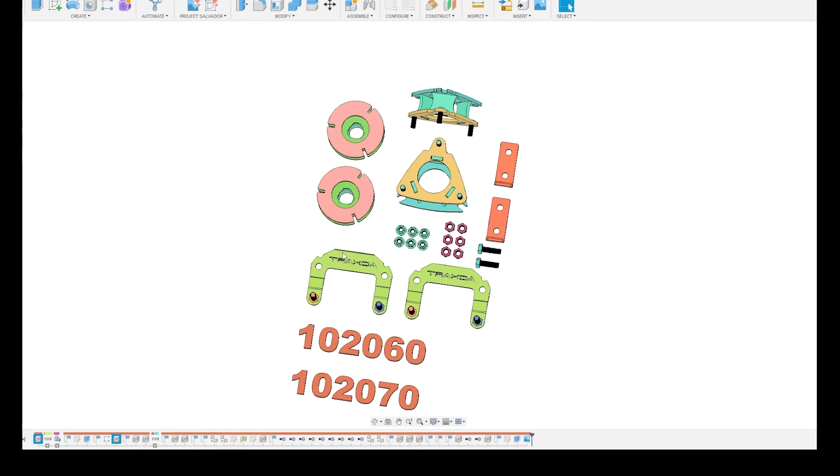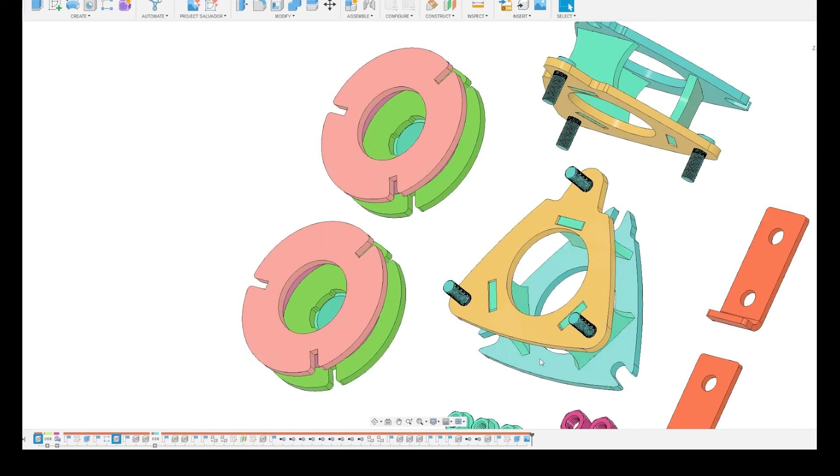So in the 10-20-60, 10-20-70 kits, the front strut part here has got a bit of an offset to that. And the reason we put that in is the MacPherson strut front ends, they tend to go a little positive camber as you lift them. And so what we're doing with this offset is we're changing some of that positive camber back to where it needs to be. The other parts for the front end that we use are these sway bar link extenders, which effectively make the sway bar link shorter.

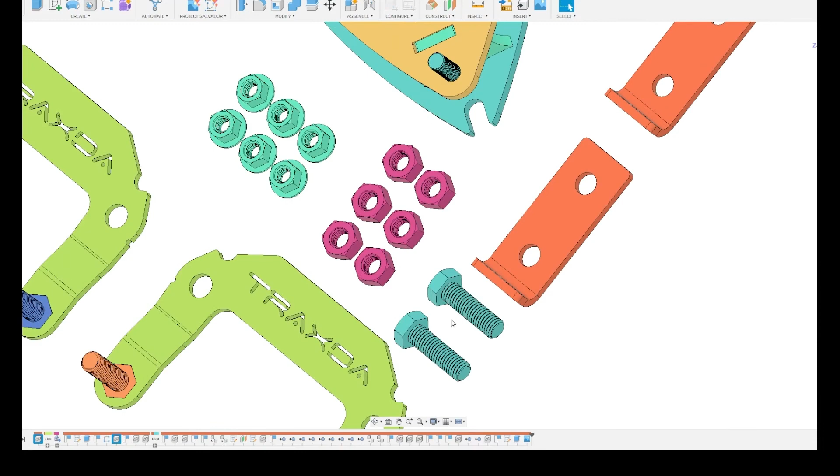The sway bar links go up to the strut instead of down to the control arm. So when we lift the truck, we have to make them shorter. The hardware with it is right there. Going to the rear of the vehicle, we have these rear spacers. The rear spacers have got some little notches in them for our ease of manufacturing. And then we have the rear shock extension.

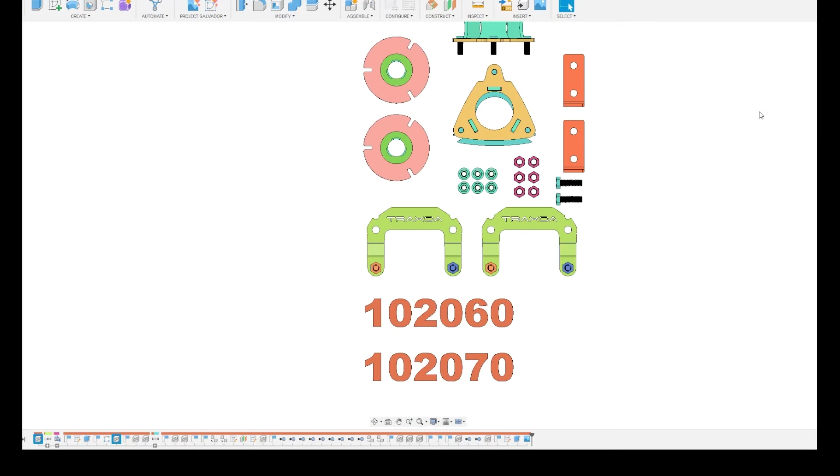So if you have this Ford Explorer, you can run a 265/65/18 tire on it, which is like a 31.5. I think that you're going to find that the front spring basket is the limit for how much tire you can put on your vehicle. Some people can probably get more crazy with some wheel spacers and stuff, but we have not tried that ourselves.

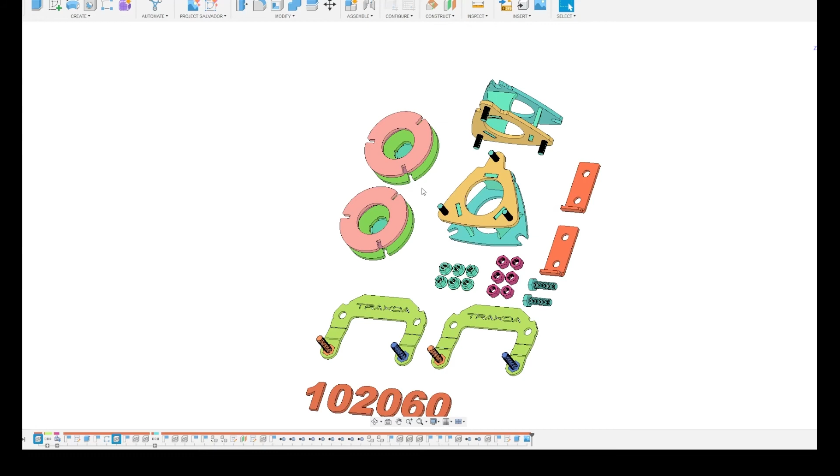Installation time, you can expect it to be 3 to 4 hours. The front's fairly straightforward. The back has got a multi-link rear end, so it's more complex. And the ride is just like stock. We don't change the spring tension. We don't make it stiffer. It works great.

Now, the original kit we developed was for the two-wheel drive. It's 2 inches front and rear. And when we got to the all-wheel drive, we found that we had to lower it down to 1.5 inches in the front, or else we'd get a vibration. When the Timberline edition came out, we learned that we can run the 2 inch in the front because it has better axles.

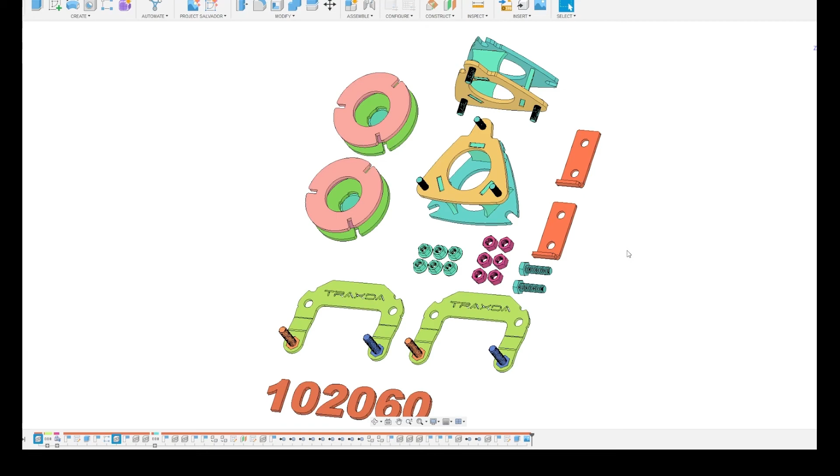So that's your information. Like always, it'll need an alignment once you're done lifting the vehicle. Every time you lift any vehicle, you have to align it.